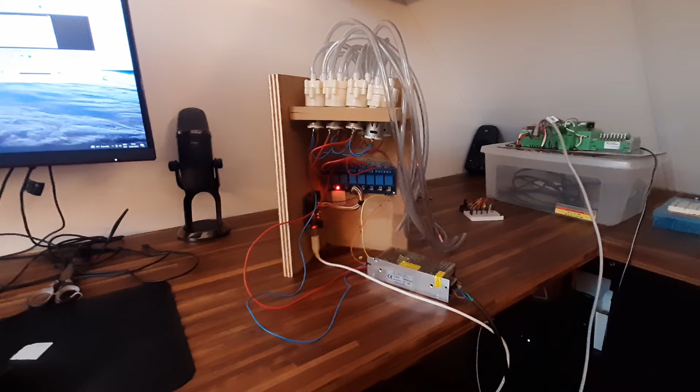Hi guys. I was tired of using the traffic light example for OpenPLC, so I tried to find some different applications. And it's time to revisit an old passion for me. Alcoholism. I mean making cocktail makers. I made some in the past on my channel.

The first one I made was this bulky one. It could mix 16 bottles. After that I made a smaller one, but with more features, like smartphone control over Bluetooth. This is the one we will program with OpenPLC.

This series is not a step-by-step tutorial to replicate the end result, but more to show you what you can do with OpenPLC, and I also will take some time to compare the Arduino code with the PLC code. This series is not at all an excuse to day drink because of testing reasons.

So first we will cover the process. You have 8 bottles of liquor and mixer to mix with. They are all connected to an individual membrane pump, and the output of the pumps comes together above the glass. Depending on the cocktail you choose in the user interface, the Arduino Uno will turn on certain pumps for a certain time to get the optimal cocktail.

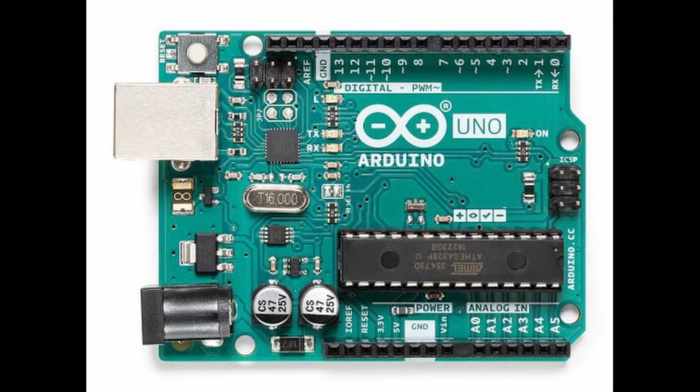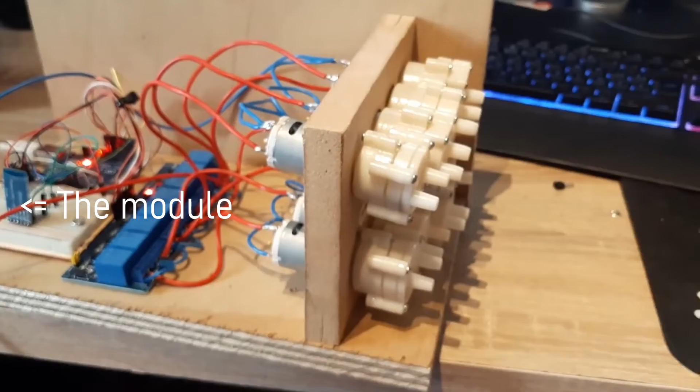The hardware is just an Arduino Uno, an 8-channel relay board, a power supply and 8 membrane pumps. In the original design I also used a Bluetooth module, but we don't need this in OpenPLC. In previous designs I tried using a flow sensor, but I kept having problems with counting the airflow instead of the fluid. I tried multiple sensors, but in the end I just found timers more reliable.

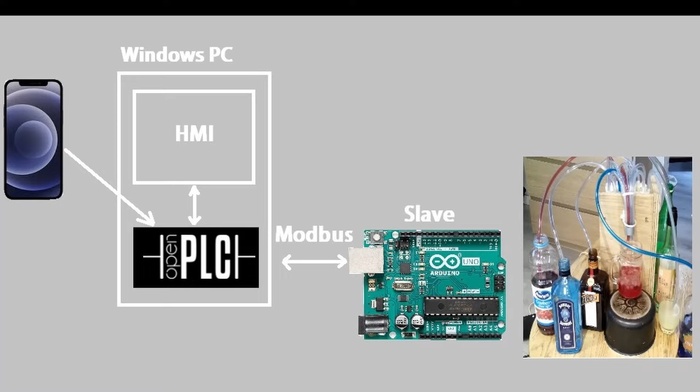So here is the layout that we will make. So we have OpenPLC in the center, then we have an HMI. We will build it for PC, but you can also open it on your smartphone via your web browser. And the OpenPLC running on Windows will connect with Modbus to an Arduino Uno slave in the cocktail maker. That will control the relay boards, and relay boards will control the pumps to make cocktails.

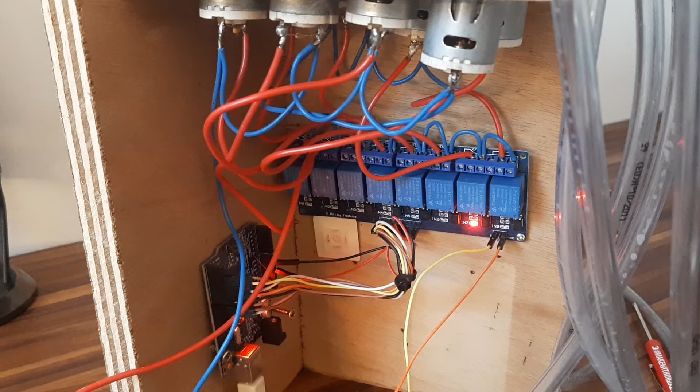The first thing we will do is try out the hardware. So we will make a program to turn on all the pumps one after the other to test that we have connection and that they all still run. Because I didn't use a cocktail maker for like 1 year or so, first of all try to make it work and test your IOs or your outputs.

We first start by opening OpenPLC editor and we create a new project. You have to create a new folder to save the project in, an empty folder. So I'll call this OpenPLC Cocktailmaker. And I will select this new empty folder, of course. Our main programming unit, I mostly call main, and we will program in FBD because I like FBD.

Then we create a function block and we call it IO test for our testing program, and we will program it in SFC, so sequential function chart. I made a video about it, if you want to look more into SFC, right here. Then we add our step 0 and we add our first action to step 0. We will set a variable.

But I forgot to add variables, so first we will add variables. I will call them output 0 to 7, so I will start with output 0. It's an output of my FB, my function block. It's the type bool, so either 1 or 0, and then I create my other variables.

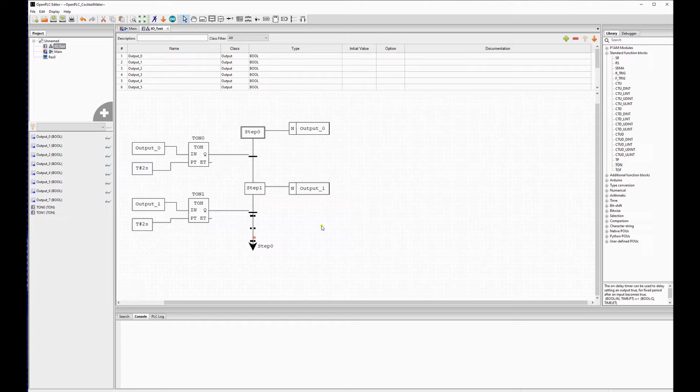We start the simulation. But before you can simulate, you have to call your function block in the main program. Otherwise, it isn't run by the PLC. We select user defined and there is our block and we drag it in the main program. Now we can simulate the PLC. And as you can see, the SFC works. So step 0, step 1, and it continuously does that.

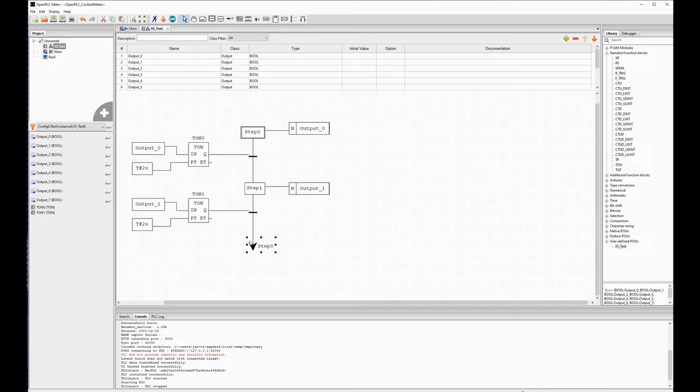So we'll continue doing this for all the outputs, so that all the outputs are 2 seconds on after another. So output 0 is 2 seconds on, then output 1 is 2 seconds on, and so on. So we can test out our IOs. The easiest way to do this is a lot of copy pasting. So I will fast forward this part because it's a lot of doing the same over and over again and it's boring to look at.

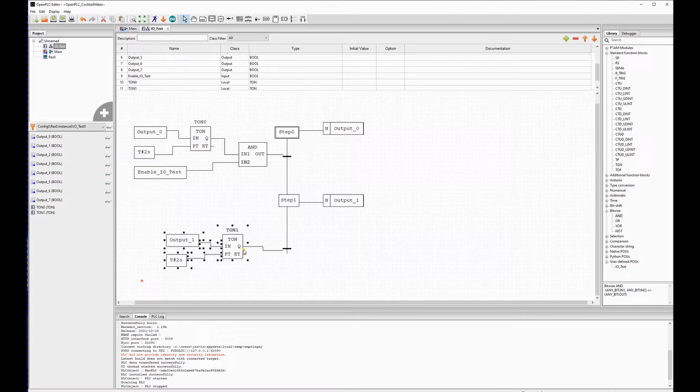The first step we will also do an AND port and we will connect an enable to it as an input so that in our main program we can connect something later on if you want to do the IO test or not. So we will define this as an input and we will call this enable IO test. So the class is an input. We drag and drop it and connect it to the AND port. Later I will connect it in the main to a variable if you want to enable the IO test or not. So now it's just a lot of copy pasting.

After step 7, we want to go back to step 0. So we select a jump to step 0. We connect it. So after step 7, it will start all over again. Now we just simulate our code, but before we do that, we have to add a variable TRUE in the main. We're just gonna connect it to TRUE, so the IO test is enabled. And then we're going to simulate it again.

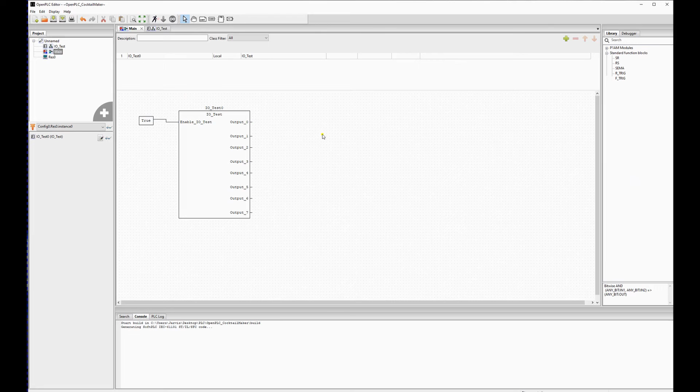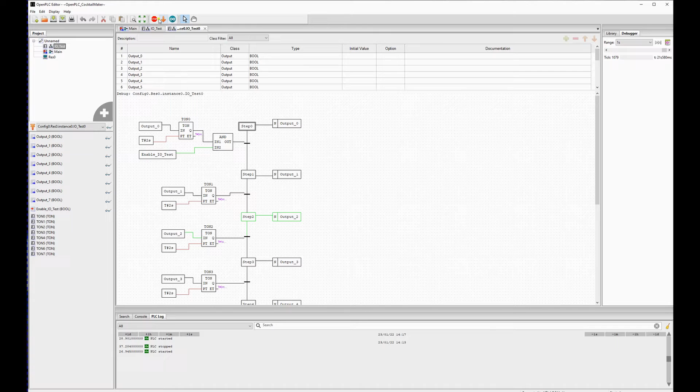We click on the glasses and then we can see it works. So each output is set for 2 seconds and then it goes to the next output. So it's good for testing my outputs in this case. Normally in other PLC brands you just force the outputs and check if they're on or off, but because I have the lights for an indication on my relay board, it's nice to do it so.

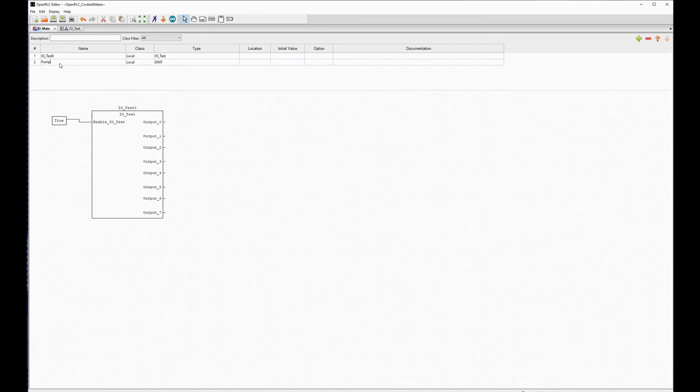Now in the main, I will connect the outputs of my function block to the pumps. I don't connect them directly to the outputs. This is because my relay board works on a low signal, so if it's 1, the output is 0, and if it's 0, a low signal, the output will be 1. So it works with reversed logic, negative logic.

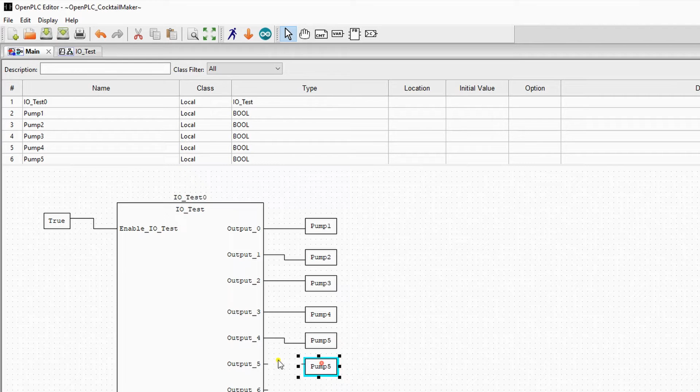I don't like to work in my program with negative logic, so I will just create variables pump1, pump2, pump3, and at the end of my program I will invert them, so it works with the negative logic of the relay board. But in my program, pump1 is just positive. You will realize it in a second or two when we are testing. So we connect the outputs of our function block to these variables pump1 to